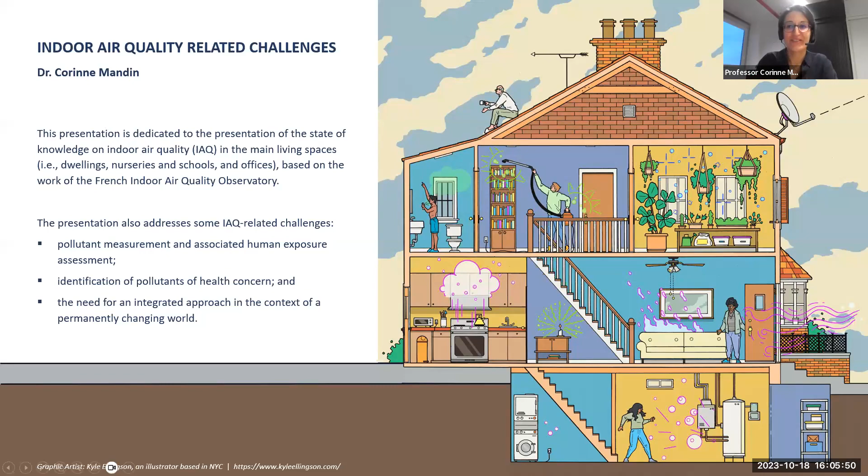So is this the beginning? So this is the presentation Corinne will give, and I think it is time now to pass to Corinne. Thank you very much, Lydia, for this kind introduction. I'll stop sharing. So I start sharing my screen. Do you see my screen? Yes. Is it in correct mode? No, it is not in correct mode. It shows double the screen, and now it's fine. Okay, great. So I'll turn off my video and mute, and the floor is yours.

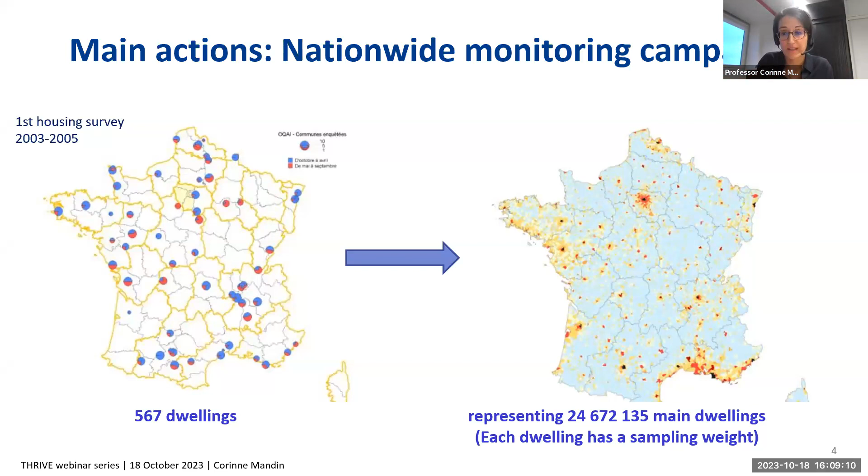So this is very powerful for the policy makers, because in a way they have a view on indoor air pollution in dwellings, in schools, or in any other type of buildings. So the first survey was carried out, as I told you, between 2003 and 2005. The second housing survey is ongoing. Unfortunately, there is no result yet. I will not show you any result from the second one.

But from the first housing survey, I will only show you this graph, these figures, that to my mind really summarize very well the topic of indoor air quality, because you see the median concentration of a group of volatile organic compounds measured in the bedroom of the dwellings on the left part of the graph, and outdoor, it means on the balcony or in the garden, on the right part of the graph.

And this graph summarizes the topic, because you see that the median indoor concentrations are all over the outdoor concentrations. And there are some compounds that are not detected outdoors. So indoor air pollution is really specific, different from outdoor pollution, influenced by outdoor pollution, of course, but different. And this is really why we need to work on this topic.

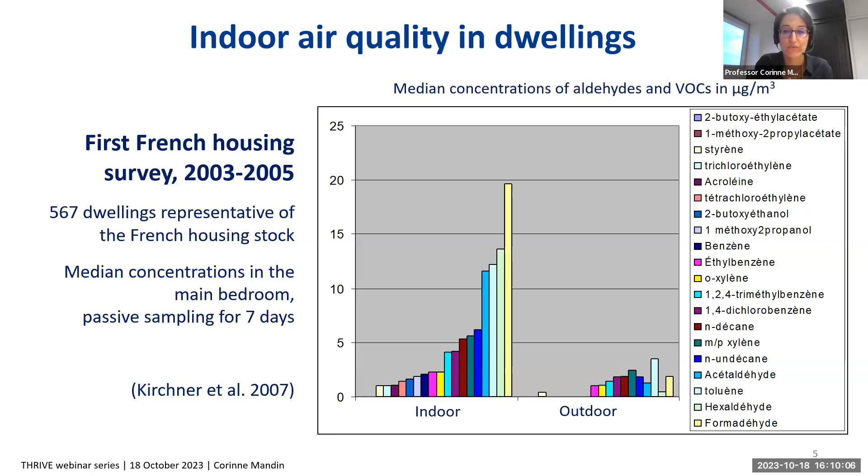And so there are many results from this survey. I will not give you all the results. This is not the objective, just a few elements. And one main result is also that thanks to this monitoring in building stocks, we have distribution of indoor concentration. And you see on this slide the distribution of indoor formaldehyde in French dwellings, still for the same survey, and it helps the policymakers to decide what are the IAQ guidelines.

So you see that the limit value of 100 micrograms per cubic meter proposed by WHO was never exceeded in French dwellings. So it was decided by the French government that it is an alert value. As soon as we are exceeding 100 micrograms per cubic meter of formaldehyde in buildings, this is not normal. There is a source, and this source must be found. Then this is an alert value. We need also a long-term value to help when we do monitoring.

Initially, the Public Health Agency proposed a value of 10 micrograms per cubic meter. This value was also proposed in California. But this value is exceeded in nearly all the dwellings in France, 86% more precisely. So the policymakers decided not to have this value as mandatory value, because this is not technically achievable. So today in France, the mandatory guideline value that, if possible, should not be exceeded for formaldehyde in buildings is 30 micrograms per cubic meter, exceeded in 21% of dwellings.

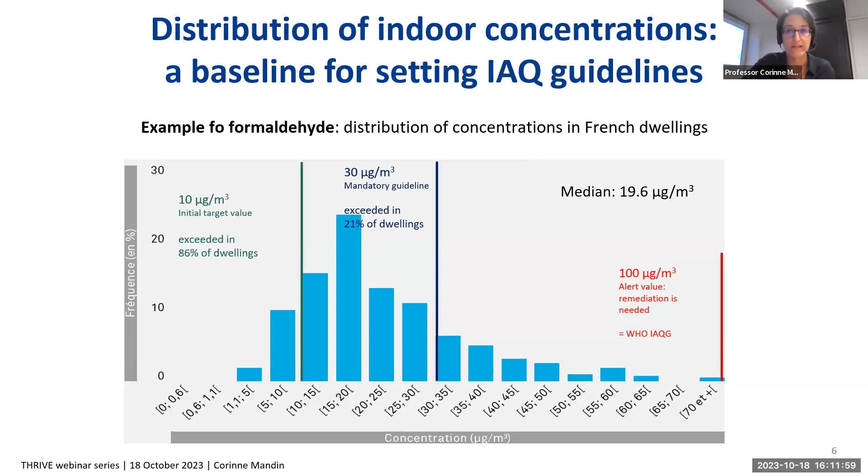There is use of school supplies that may emit volatile organic compounds. There is a high density of furniture and a high density of occupants. And contrary to dwellings, there is daily cleaning in school buildings, so maybe a daily emission of volatile organic compounds emitted by detergents. And one last specificity is that all the school buildings are close to a road so that the children can join the school. So school buildings are really influenced by the outdoor air pollution.

And on top of that, we observed that these multiple sources are combined to poor air change, because when we asked the teachers if they opened the window, they told us through questionnaire that no, they don't open the window. It's because of outdoor noise, because of safety of children, because of thermal comfort issues, simply because they don't know and they forget. So for many reasons, they don't open the window. And in parallel, I don't know the situation in Australia, but in France, there are really few mechanical ventilation systems installed in school buildings.

Only 1/4 of school buildings have at least one classroom equipped with a mechanical ventilation system. So it's really rare. So the schools we observed are quite poor buildings because of a lot of sources and poor ventilation.

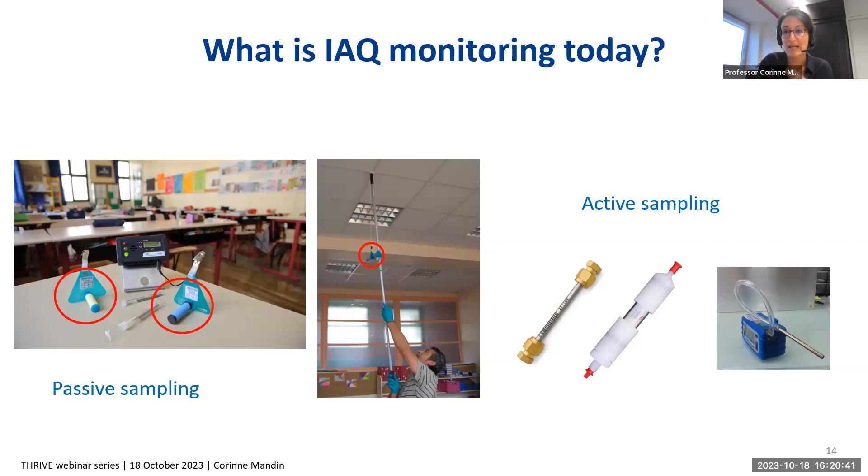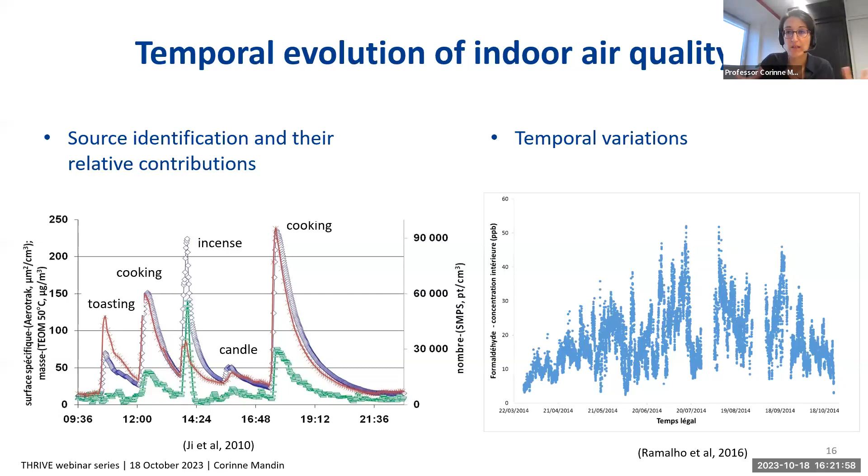And it allows measuring over a very long period. With classical monitoring, you cannot repeat every week or every day over a year. It would be too expensive. But with such devices, sensor systems, you can measure, as you see on this graph, over 1 year, and you can see that in summer, the concentration of formaldehyde here is higher than in winter. So this is really helpful. And with this big data in front of us, we have a huge amount of data that can be used to better understand indoor air pollution. So it's useful for the researcher, but it's also useful for building managers.

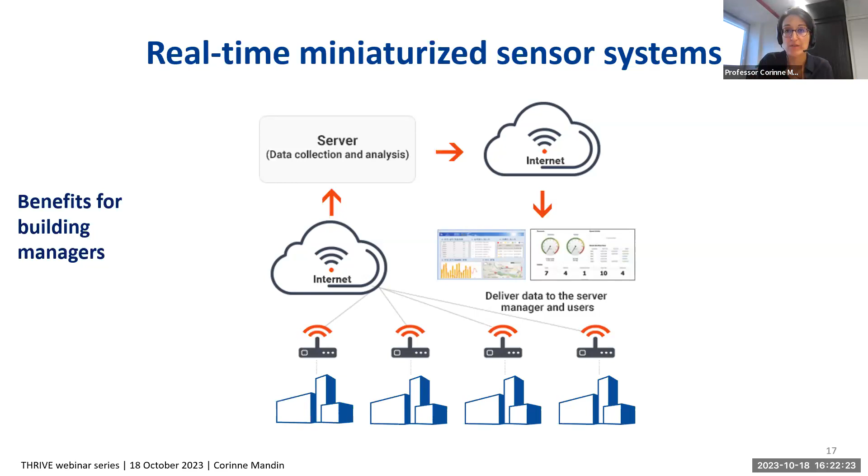And because with these low-cost devices, many buildings can be equipped, and you can follow remotely what indoor air pollution is and identify if in one building there is a trouble with the mechanical system or if there is a specific source. So we are going towards smart buildings, and I will not detail more today, but Lydia worked on this topic, and I mentioned this paper about smart homes and the control of indoor air quality. And I also saw on your website the Thrive program is having a dedicated program on intelligent buildings. So this is a very important topic, in my opinion.

So important for researchers, for building managers, but also for citizens, for building occupants, because this can help with the perception of indoor air pollution. And during the COVID pandemic, worldwide, some CO2 sensors were used, and with traffic light indicators, it was showing if it was turning orange or red, that windows should be opened. And in schools especially, it's very useful, since schools are poorly equipped with mechanical systems. Such a device based on CO2 measurements and traffic lights can help the teachers to open the window, because we observed, and I told you, that sometimes they just forgot, and they just don't realize that indoor air is becoming of poor quality.

So of course, everything is not perfect, and we still have some challenges with these IAQ sensors, because some remain expensive, and with the low-cost ones we really need to pay attention, because I don't know about Australia, but at least in Europe right now there is no certification, no standards. So when you are buying a sensor system, you don't know if it has been tested, and some are not reliable. Some have interferences with humidity.

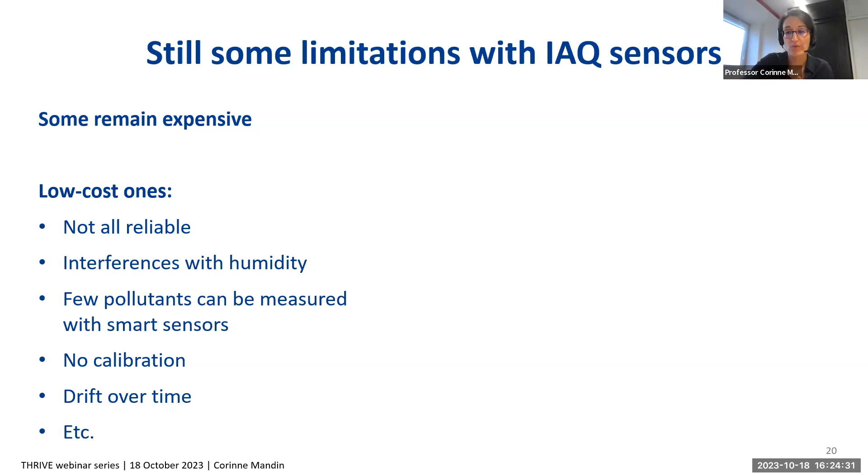And the second example is about CO2. So once again, we injected three concentrations of CO2 in the experimental chambers; this is the red lines. And the standardized measurement was done with a Q-Track. This is the dark blue line. And contrary to the PM2.5 that was underestimated, here the CO2 concentration is overestimated, because CO2 is not measured directly, but sometimes it's based on VOC measurements, and then it's a calculation.

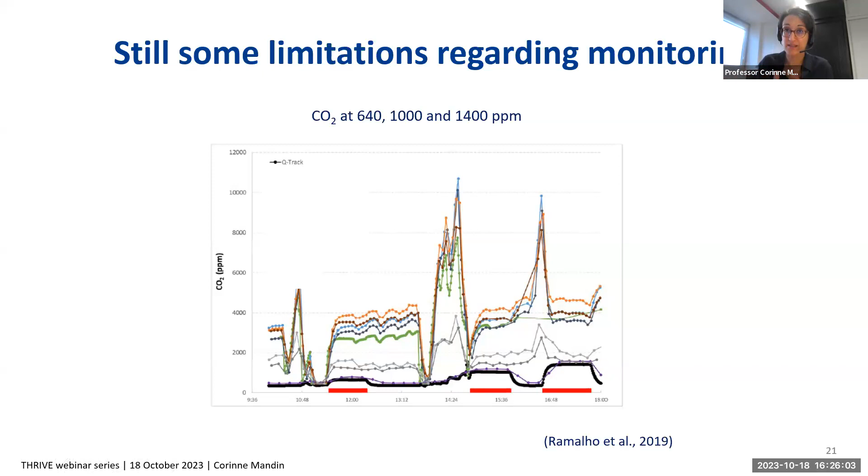So the concentration was reaching 10,000 ppm. That is not possible. So it's really to show that these low-cost sensors are full of nice perspectives, but we still need to pay attention to these devices. And we also need to pay attention to the environmental impact, because multiplying these electronic systems worldwide, if they are all out of order a few months after being installed and we keep installing new ones, this also has an environmental impact we need to keep in mind.

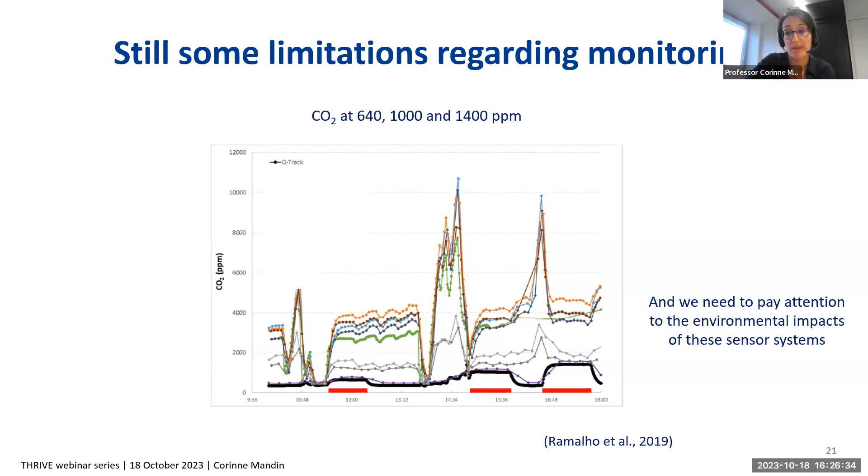So the second challenge. I hope you still see me. So on one hand, we need to develop this easy monitoring to make indoor air quality understood, but we also need to keep on measuring accurately, to keep on measuring the specific compounds, because indoor air quality is permanently evolving. So I show you on these slides the evolution of the median concentration in dwellings, in bedrooms, in micrograms per cubic meter over time since 2001.

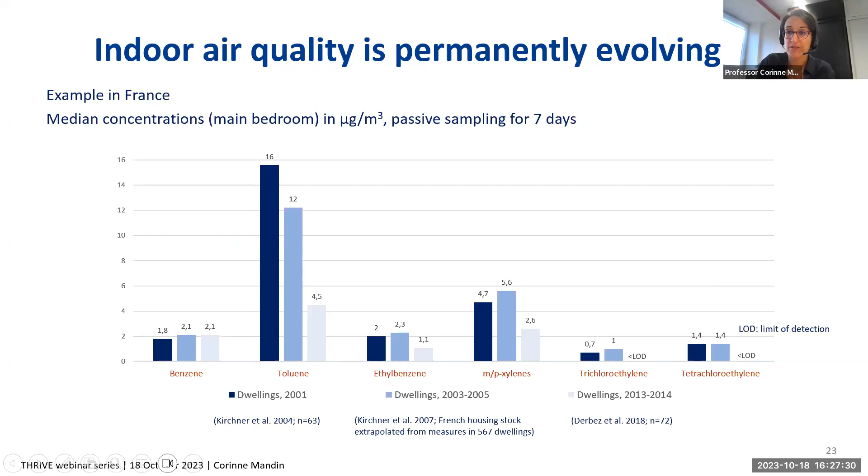And you see clearly that for toluene, ethylbenzene or xylenes, we have a decrease in concentration. These organic solvents are not used anymore in consumer products. So we observe a decrease of concentration. For chlorinated compounds, such as trichloroethylene or tetrachloroethylene, we don't detect them anymore today in buildings. The median value is below the limit of detection. So indoor air pollution is evolving.

So I just showed you an example for France, but I can also illustrate with studies in Germany. You see on this graph the results of measurements that were repeated in Germany in the same dwellings, several hundred dwellings. This is a very unique study. Such studies are rare, and you see that over time, the concentrations of alkanes, aromatics, and chlorinated hydrocarbons have massively decreased. And similarly to France, there are no chlorinated compounds anymore in indoor air.

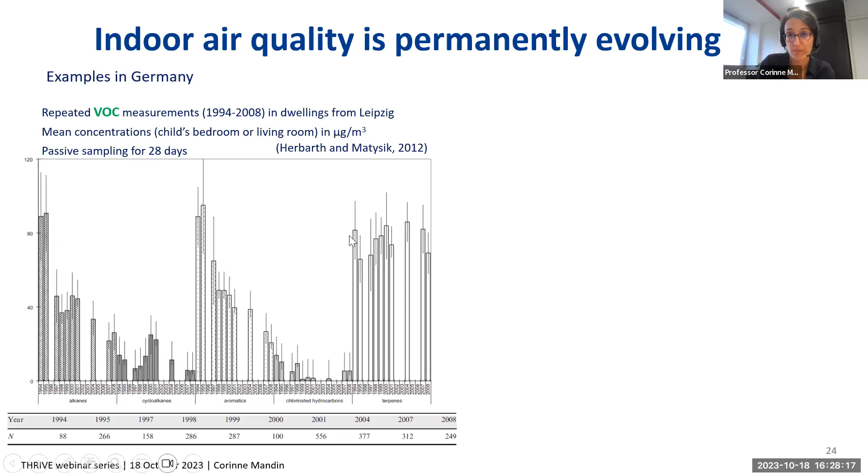Terpenes are a bit different. The concentrations are stable, and we will discuss this a bit later. And another example of measurements done in Germany, about aldehydes. In Germany, they also have a nationwide monitoring survey called GerES, the German Environmental Survey. So they do measurements in dwellings.

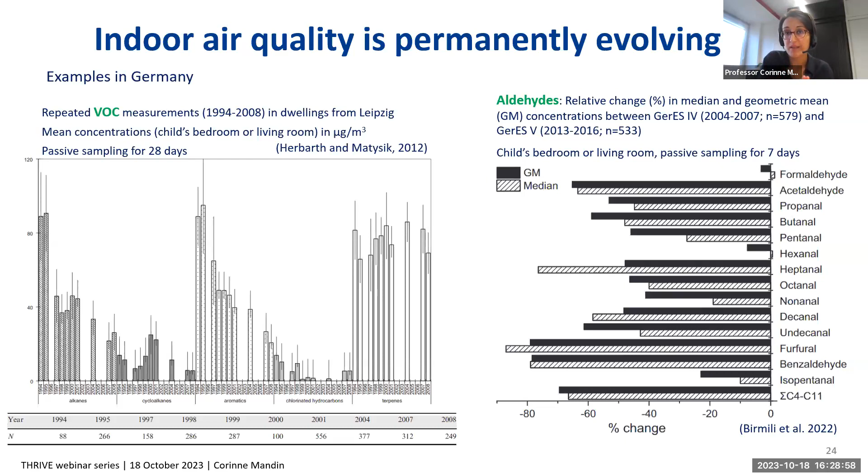And you see on this graphic the median concentration of aldehydes between the survey performed between 2004 and 2007, and then between 2013 and 2016. And for all the compounds, except formaldehyde and hexanal, there was a statistically significant decrease of indoor concentration. So in a way, indoor air quality is improving. But on the other side, we have new uses, new habits in our buildings, and we introduce new compounds, and we increase indoor pollution for some pollutants.

For example, I give you a few examples here. We are using fluorocompact lamps to save energy, and they may emit mercury. Vaping has appeared recently, and vaping emits glycols, for example. Another example is 3D printing.

So 3D printing is not only in offices, in professional buildings. It can also be used at home, and 3D printers may emit particles and other compounds. And more recently, with the COVID pandemic, we observed the massive use of disinfectant in dwellings, and we know that there could be quaternary ammonium compounds, for example.

And I could cite many other substances for which the concentrations in buildings are increasing. Terpenes, fluorinated compounds, you may have heard about PFAS in Australia as well, siloxanes, synthetic musk, pyrethroids that are used as insecticides. Because we are using more and more scented products, more and more personal care products, these substances are increasing in our buildings.

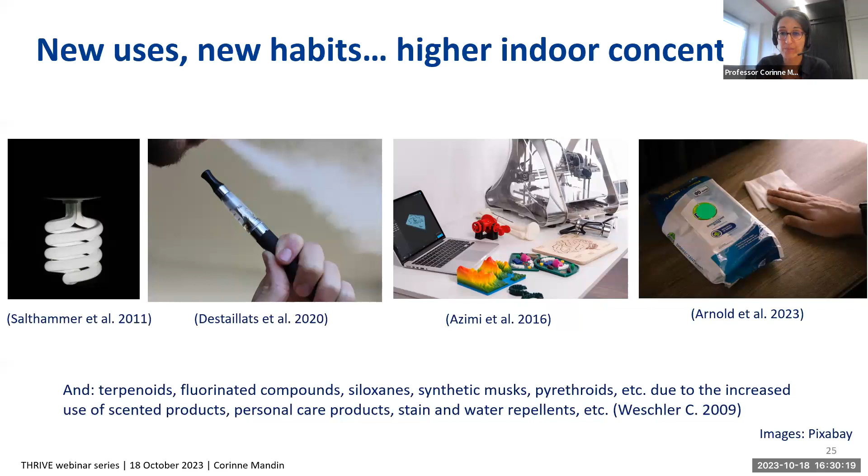So there are existing substances for which concentrations are increasing, but we also know that new substances are placed on the market. And still from this German survey, I show you this interesting example. So during this nationwide survey in Germany, they measure indoor air quality, but they also take the dust sample from the vacuum cleaner bag, and these samples are stored and frozen.

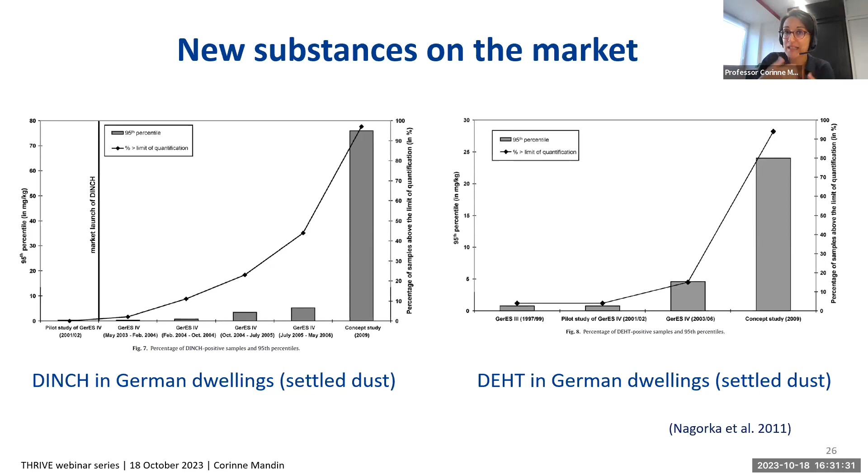So indoor air pollution is permanently evolving, and we need to be able to measure this. And so I was mentioning new substances put on the market, substances for which indoor air concentrations are increasing, but there are new substances that were ignored before, because today there are new techniques called non-targeted analysis that allow us to identify all the substances in indoor air.

Because in the past, when we were doing measurements, we needed to know which compounds we were looking for to use the techniques able to detect these compounds. But now with this NTA, non-target analysis, we detect everything. And this allows us to detect several thousands of substances in indoor air or in settled dust. These techniques are still very expensive and not widely used.

I mentioned a few studies here, but for example, in a recent study performed on settled dust, nearly 2,300 substances were detected in settled dust in the frame of the NORMAN network in Europe about emerging compounds. So we still have a huge amount of knowledge to gain.

One slide about the nano size, because we have some substances such as titanium or gold that are not toxic when they are not at the nano size, and being at the nano size means having a diameter below 100 nanometers. This is what we call the ultrafine particles, or nanoparticles if they are specifically introduced in building materials. Being at this nano size gives these substances new properties and new toxicological properties.

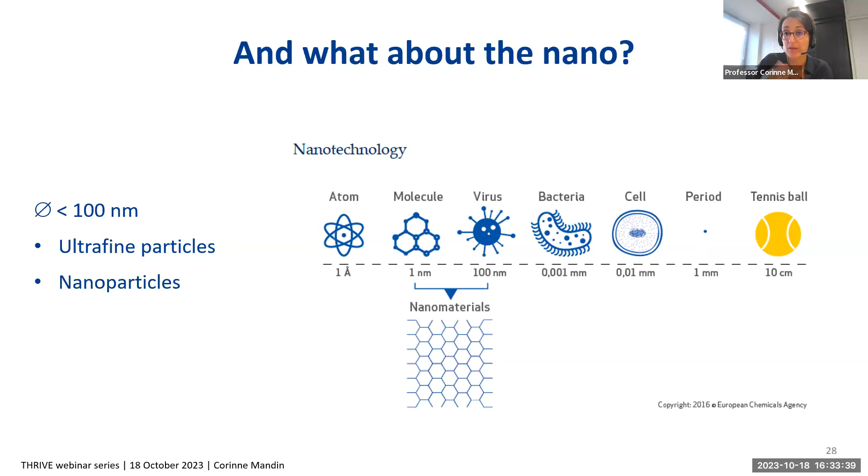So we also need to pay attention to the nanoparticles in buildings due to nanomaterials, the paints that we may use, photocatalytic paints, for example, that are used to clean the indoor air. They may emit these nanoparticles if they are removed or if you are doing works in your dwellings.

And I spoke a lot about the chemicals, but we also need to mention the airborne pathogens, the new pathogens that are appearing in our life. And SARS-CoV-2 was a good example of a new pathogen. I will not develop much more because Lidia is much more expert than me on this topic.

And I just want to show you this graph from the World Economic Forum that has just been published in the new edition of the Global Risks Report, and I find this graph very interesting. This is all the global threats and the interconnection of the threats worldwide. And infectious disease, of course, is among these major threats for humanity nowadays.

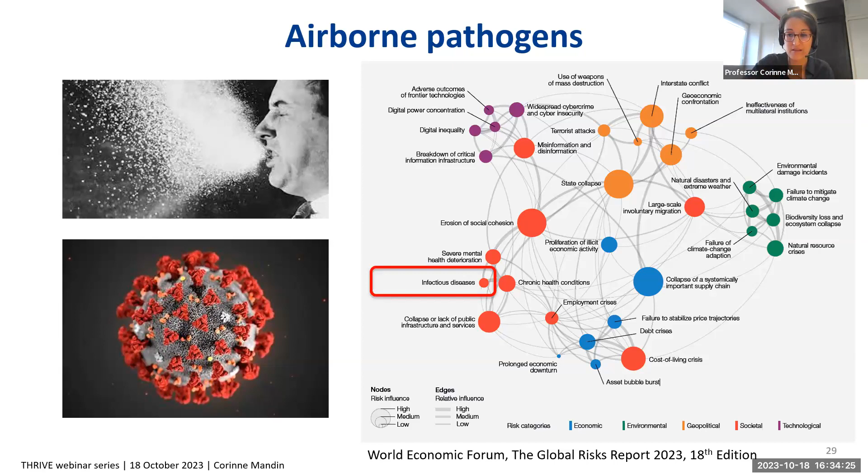The third challenge that I want to discuss with you is the need for an integrated approach. I just show you this graph from the World Economic Forum, showing all the interconnection and the complexity of the world in which we are living.

So we need to put indoor air pollution in a global frame, in a larger frame, to be able to have this integrated approach. And so we discuss a lot about indoor air quality, but we need also to pay attention to indoor environmental quality. It includes also thermal comfort, acoustics, lights. This is important for the health and well-being of people.

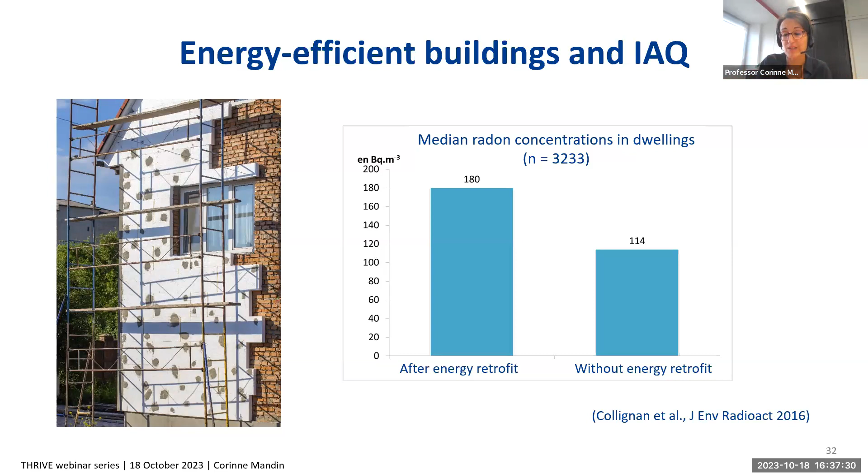And when we looked more carefully at the renovation actions that were done in these dwellings, we observed that ventilation was not considered a lot, was ignored in most of the situations. People are changing their windows, they're insulating the walls, they are changing the envelope insulation, but they forget to install a mechanical ventilation system. So the building is airtight, and the air is not renewed anymore. So that's why this can lead to increased indoor air concentration.

So we really need today to work with people working on energy performance and to embark indoor air quality in the energy renovation, energy retrofit, to be sure that we are improving the building. We have an overall performance of the building, the energy performance, but also health and comfort performance.

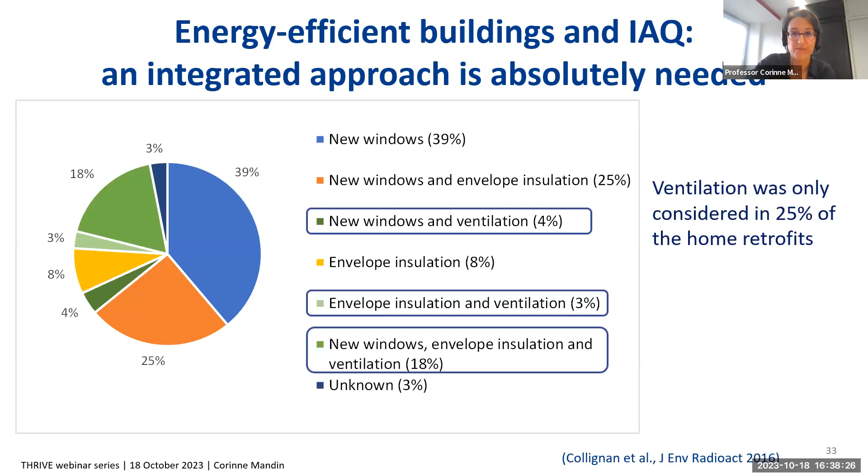And another aspect in which we need to consider indoor air quality is the circular economy. I don't know if in Australia this is a hot topic, but in Europe, the circular economy is really discussed and really promoted. And so reusing materials and reintroducing some materials in buildings could lead to reintroducing some forbidden compounds, phthalates or asbestos. So we really also need to consider indoor air quality, the quality of materials, when we are reusing the material from the buildings.

We know that climate change will lead to higher ozone concentration outdoor, and ozone is involved in indoor reactivity. So it can lead to new VOCs or ultrafine particles in buildings. If it's warmer, we may use more air conditioning, so windows may be less open, so it may lead to increased indoor concentration if there is no mechanical system. But on the other side, maybe it will be better, because with a warmer climate, maybe windows will be more open in winter or in other seasons. So it could lead to decreased indoor concentration.